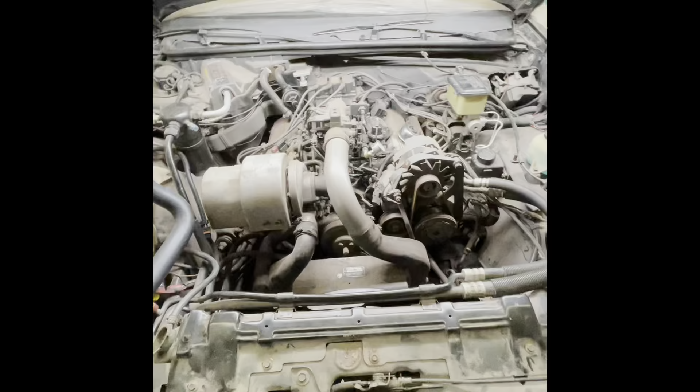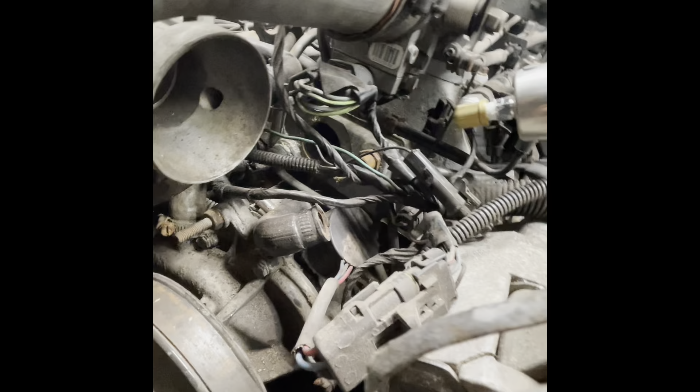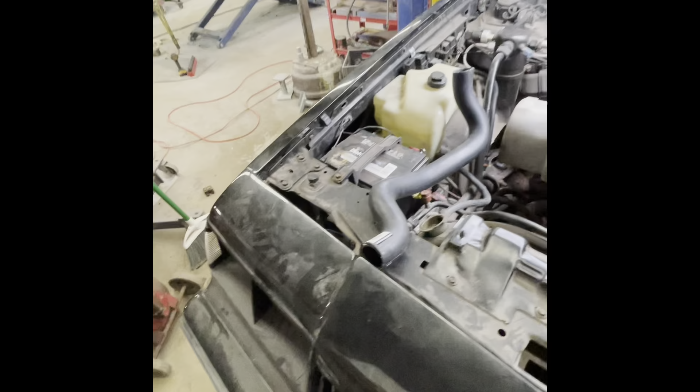Guys, we're starting to run out of stuff to do. I got a lower radiator hose, and I've already pulled out the upper. I got the thermostat out, you can see it behind all this mess. I think I'm going to get a new thermostat housing. They're fairly inexpensive, and mine's a little crusty looking.

So today we're just going to be trying to finish up some odds and ends. I'm still waiting on some wire, and I'm still waiting on O-rings for the fuel lines. I'm hoping to get all that this week, and I'm thinking next weekend we're going to be firing this thing up. I'm going to try my best to get everything else I need and get this thing started by next weekend. Today is Father's Day.

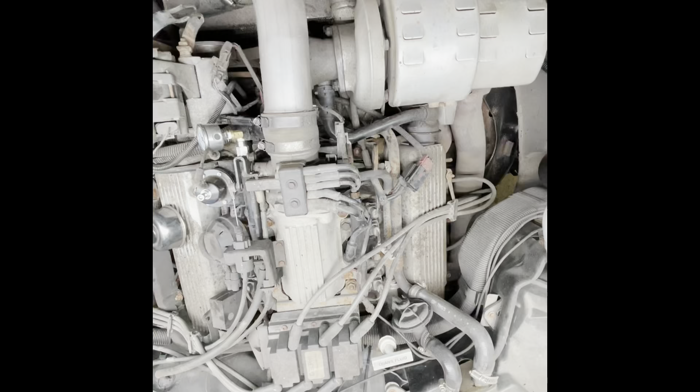Old clamps, yeah, a little crusty. They still work, you know, they've been working. But new hose, new clamps.

Alright guys, we got the hose in. It's all hooked up over here. I know you can't really see it, but it's in there.

Now we are going to attempt to put some plugs in. And I'm going to tell you the truth, I don't really care to put plugs in. I got big ass hands and it makes it difficult. But here we go.

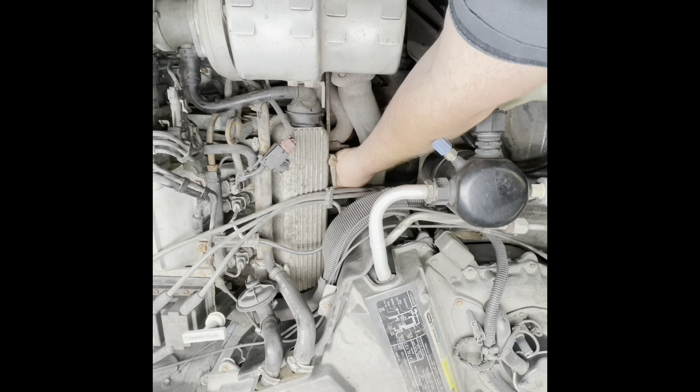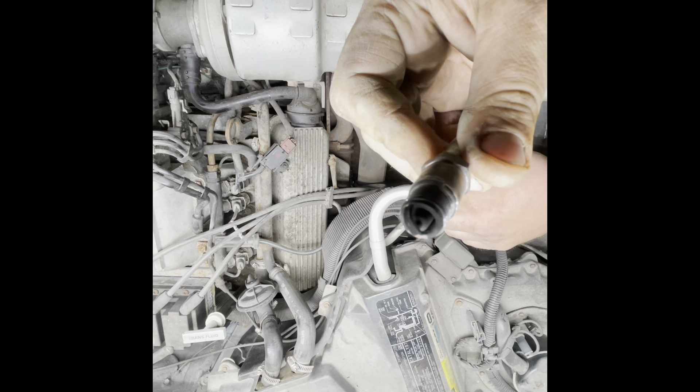Got our first plug out. She's pretty blackish, I don't know what that means, but it's black. Here's what we're putting back in there. Got a tiny dab of anti-seize on there.

Got this side done, now we're gonna tackle this side. It don't look too bad. The other side was not bad at all. Plenty of room in these old beaters.

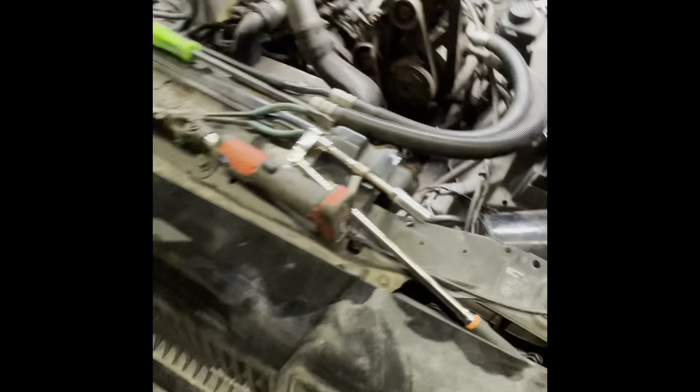Alright guys, I just finished up the last plug. That was probably the easiest set of plugs I've ever put in. I tightened them all down to 15 foot-pounds, so they shouldn't come out. Yeah, we're gonna see what else we got left to do and keep going.

Well, I guess the belt's next.

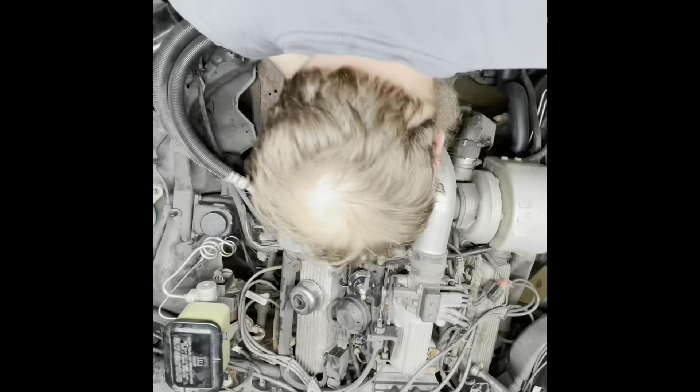Well, there she is, new belt. Did the belt, the plugs.

We're going to be taking a look at the wiring, see where we can put all this. Just got to hook straight to the battery. Not really sure where I'm going to put it.

Alright, after some looking around and figuring out, I ended up popping that loose. We're going to mount them here. Ran the cable around here and around here. And she'll sit under here, something like that.

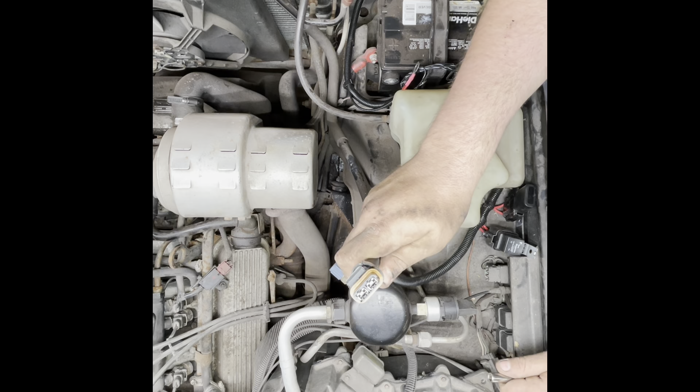This looks a little short. Yeah, that's because I bought a wiring harness for a trunk mount battery. Well, I figure it's going to be cheaper to extend this than put the battery in the trunk. So that's what we're doing.

This will go, we'll chop her off, extend her all the way back to the gas tank, and it'll go to that other harness that I showed you that's going to get soldered a little later.

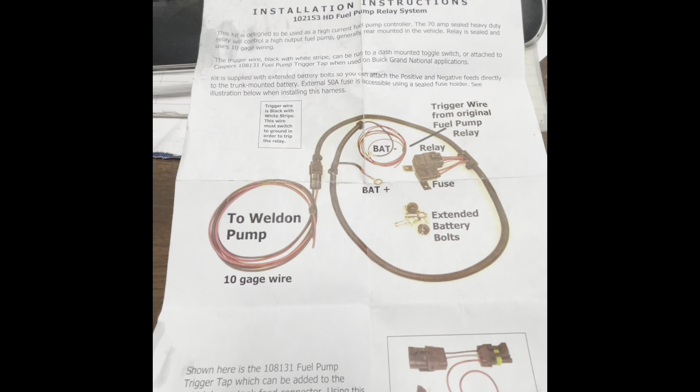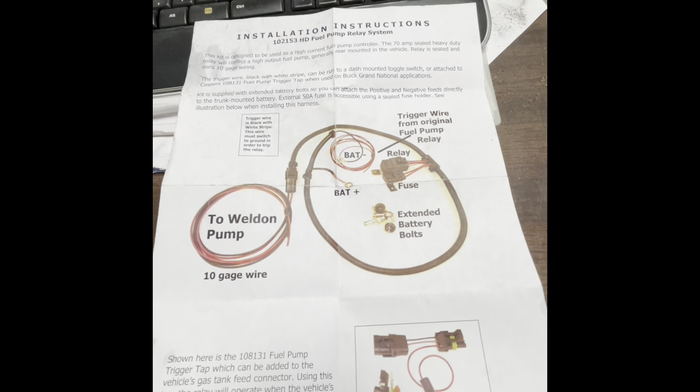Alright, here's what I got. I got this HD fuel pump relay system. So you've seen that in the car, and like I said, that's the trigger switch and power. And so we got this kit down here. That is right here.

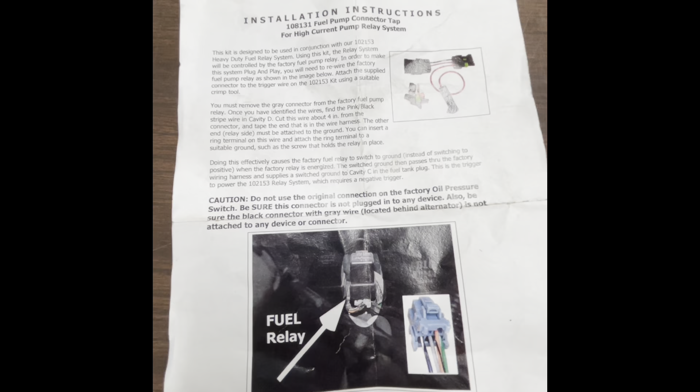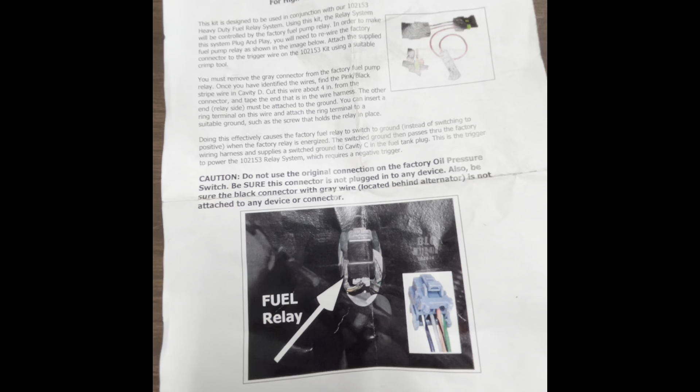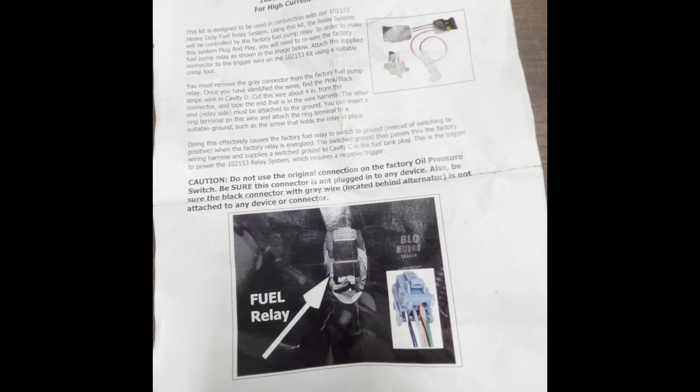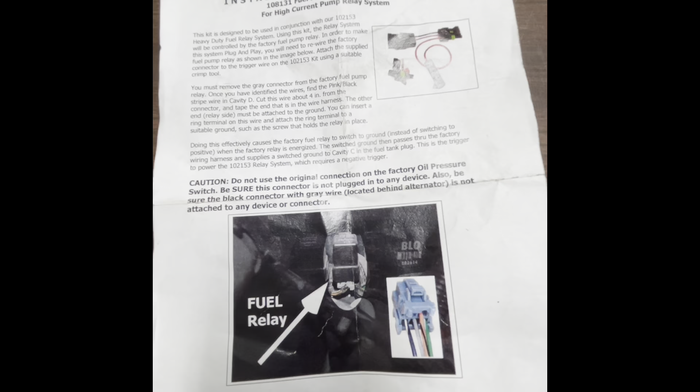And so we're going to be trying to do what this says. We got to find a wire in the fuel pump relay harness, cut it, and run it to ground. The HD fuel pump relay system needs a ground on the trigger wire to activate the relay. So in theory, when I turn the car on and the stock fuel pump relay comes on, it will also turn on my HD pump relay.

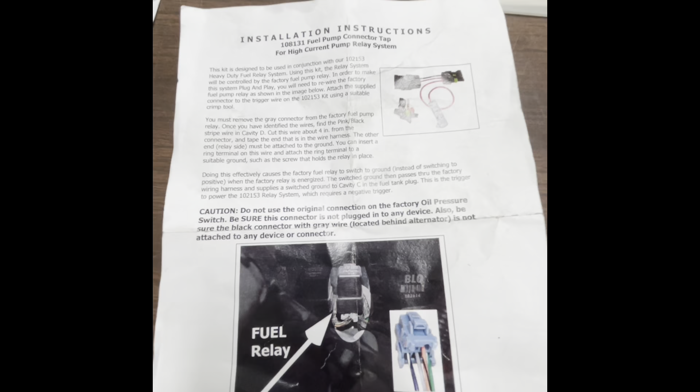So we can run this big bad fuel pump. So yeah, we're gonna read this and figure out what the hell we're doing and see if we can mess something up.

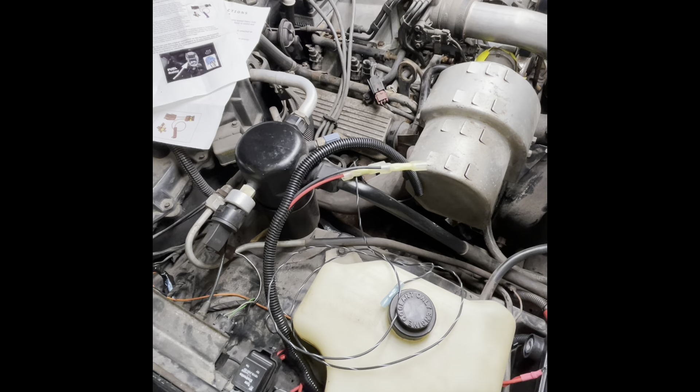Well, that's about as far as we can go with the wiring until I get some more 10 gauge wire, and then we can run it to the back. I could put the tank in now, but I'm just waiting. I want to get some more of this stuff to put over all the wiring from here to the back. So just a few miscellaneous things. And man, I'm telling you, we might be starting this thing up next week.